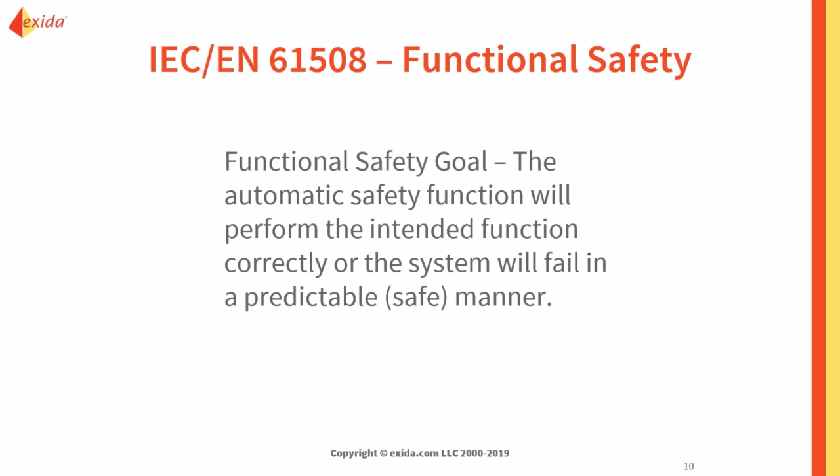Functional safety enables that freedom from excessive or unacceptable risk. And it's achieved through following something called the safety life cycle. And we will look later in this webinar at what the standards say about that safety life cycle. In general, functional safety has been adopted from two main industry standards, IEC 61508 and IEC 61511. And we're going to see what those are next.

So what are functional safety standards? There are many different standards out there in functional safety. The overall, or the main standard, is IEC 61508. It is sometimes referred to as the umbrella standard because it kind of covers all of the other standards that fall beneath it. It's targeted towards OEMs or manufacturers.

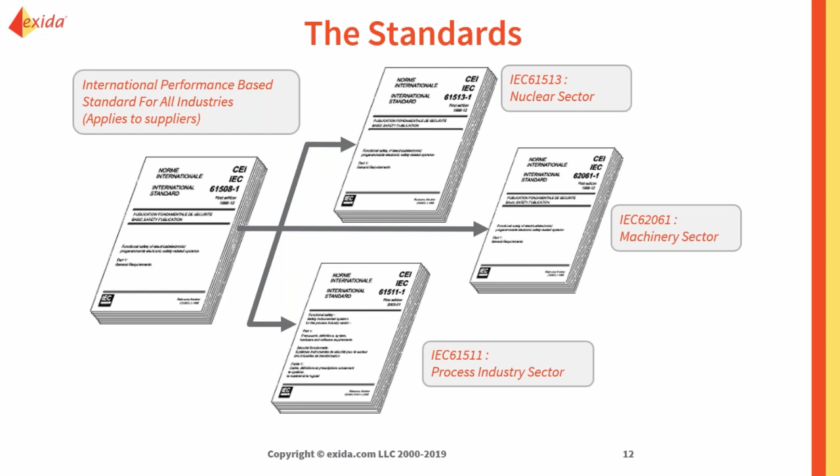However, underneath it fall more specific standards for each industry. So if you are in automotive or nuclear or machinery or process industry, under this IEC 61508 standards fall those more specific standards. And we're going to talk about the two primary standards that come up in functional safety and in the process industry, which are IEC 61508 and IEC 61511. And we're first going to look at IEC 61508.

The newest version was released in 2010, and it is aimed at manufacturers. So it is going to be talking about how to build a device and make sure the device is going to work correctly. It's going to apply to any automatic protection system, and it helps shield against both random hardware failures and systematic design failures.

Some of the great things about IEC 61508 is the way it was written. It can be applied to both project and product level work. So that could be the same off-the-shelf device used in many different applications, or it can be applied to making a specific product for a specific customer.

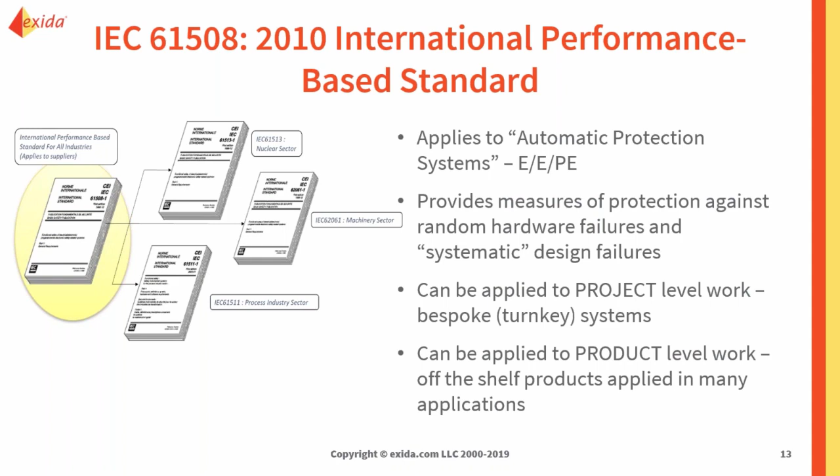It's also a performance-based standard instead of a prescriptive-based standard. The great thing about it being performance-based is it gives you end goals which you want to achieve, but it lets each company individually decide how they're going to achieve those. If you had a prescriptive standard, like a lot of the standards are, it gives you the steps and the directions. Step 1, 2, 3, 4, in that order you must do. However, IEC 61508 gives you your performance goals or those end targets to shoot for, and you yourself can decide how exactly to implement them.

IEC 61508 came about when people from different working groups and national standard bodies from all around the world came together because they wanted one area for functional safety, because it was scattered throughout many different standards before. And they wanted to bring it together under one document, one big standard, and they made IEC 61508. From that standard, it then branched out into more specific industrial standards that we talked about, like the automotive or nuclear or machinery, or the process industry like IEC 61511.

As I said earlier, it was originally made in 1998 and 2000, but the latest edition has been updated in the 2010 version of the standard. And the standard is targeted to suppliers, those people making devices. And it's mainly used by safety equipment suppliers to show that their devices, their equipment, is suitable for use in safety systems.

It contains requirements for those suppliers or manufacturers of process controls and instrumentation for component, element, and subsystems. And because of those requirements in the standard, a lot of end users usually seek suppliers that have products that are certified and proved that they meet all of these requirements by a third party.

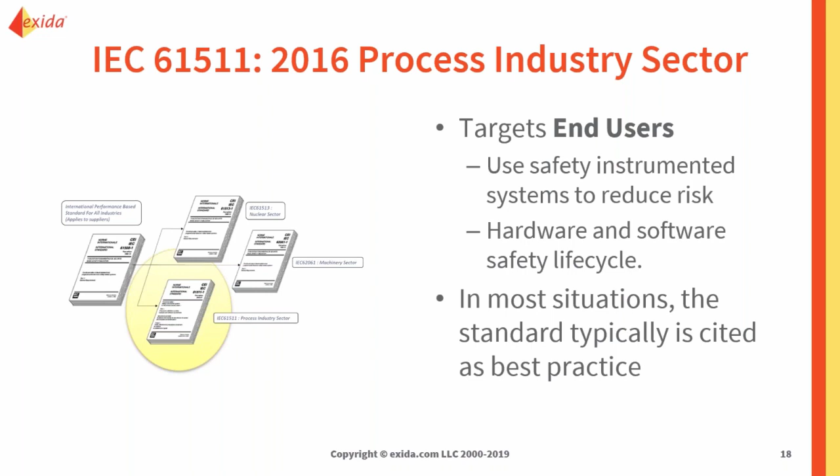The main objective of IEC 61511 is to use safety instrumented systems to reduce risk to some tolerable level by following a safety life cycle and maintaining the associated documentation. Just like IEC 61508, the standard focuses on a life cycle that processes and tries to manage risk. IEC 61511 was originally published in 2003, but its latest edition was published in 2016.

A couple fun facts about IEC 61511. Just like IEC 61508, it applies to any automatic protection system. It falls under that IEC 61508 umbrella. So if you ever find a requirement that isn't listed in IEC 61511, it says, please go back to IEC 61508 to see what it says about it. It is broken up into three main parts: one of rules and regulations and two guideline parts.

Just like IEC 61508, it gives a definition of the concept of what a SIL is, what safety systems are, and what that safety life cycle is. However, this time, it's how those end users can use SIL and how they can figure out how much risk they need to remove from their plant.

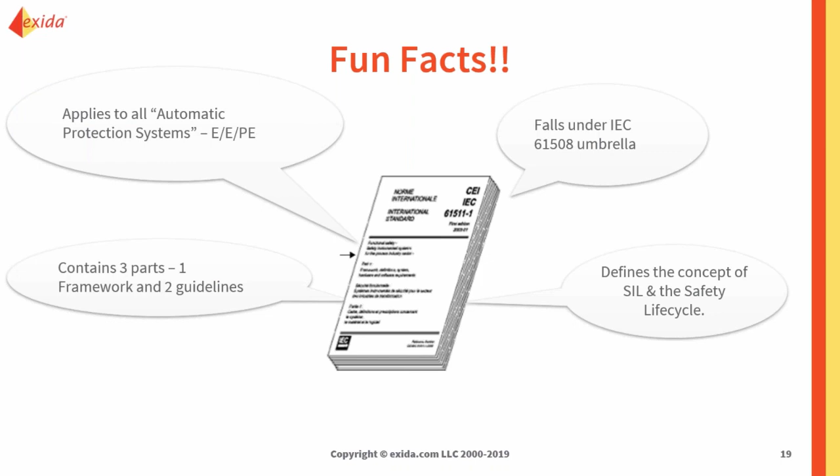IEC 61511, just like 508, recommends the use of a functional safety life cycle, and any life cycle can be used, but the standard also gives you an example and lays out a process which is pretty nice and easy to follow. Just like IEC 61508, it's broken up into three main sections: the analysis phase, the realization phase, and the operation phase. In the 2016 edition of the standard, it addresses cybersecurity in the life cycle, showing how more and more of a concern cybersecurity is becoming.

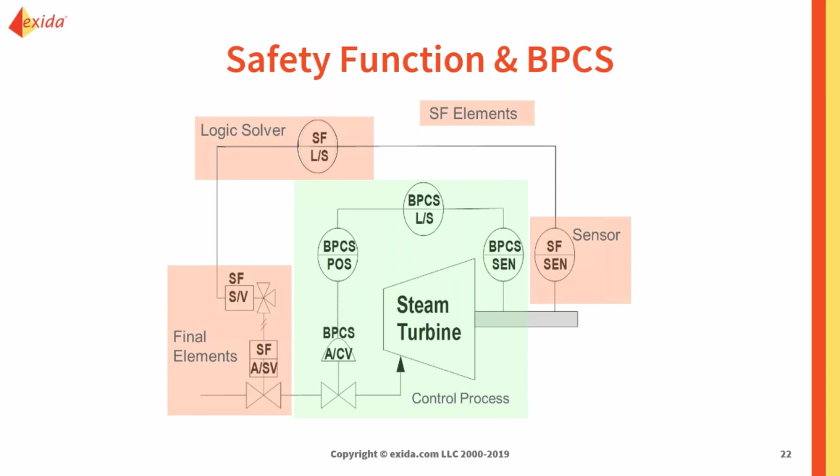So your safety function is going to be the action of a set of equipment to make sure that a particular hazard doesn't happen or it gets mitigated. It is the job of the safety instrumented function, and we'll learn about that later on in the webinar. So as you see here, you have a safety function. It has its own sensors, logic solvers, and final element that can control the process besides the normal operating process. So with a safety function, you're going to want to realize that there's a problem and act upon it.

So what are some examples of safety functions? An example that most people think of right away if you're in the process industry is an emergency shutdown valve, or an ESD valve. What does that do? It will shut down the process. Another example of a safety function is a sprinkler system. Upon realizing there's a fire, the sprinkler system acts, puts on the sprinklers, and mitigates your issue, hopefully. Other examples of safety functions: high pressure in a vessel opens a vent valve.

One thing that we get asked often is, what about an alarm? Is an alarm an example of a safety function? On detecting a fire, maybe an alarm triggers and it minimizes the damage and possible injury. So would that be a safety function? Well, no, not really. Yes, it's doing a great thing. However, it is not a full safety function, since it never achieves that safe state. It never tries to mitigate the hazard. So remember, for it to be a safety function, it needs to implement that automatic mitigation of a particular hazard. So that final action must be included. But if that alarm system was tied to your sprinkler system, now we have a safety function.

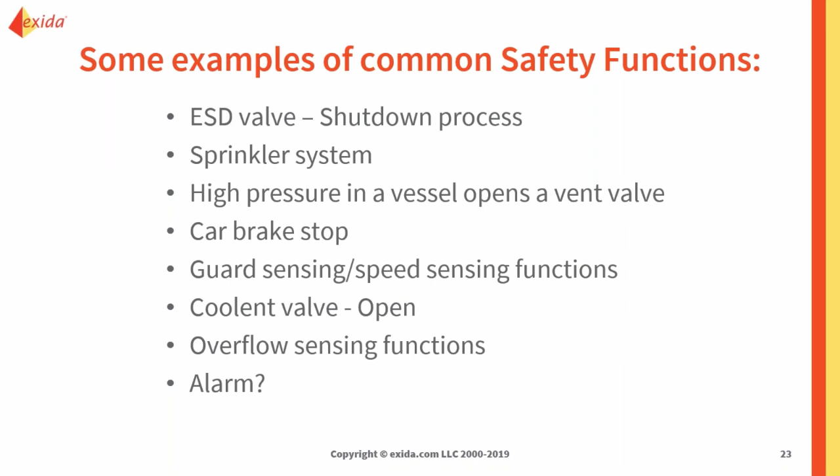The next section is SILs and SIFs and SIS, oh my. So what do these all really mean? As I told you earlier, there are so many three-letter acronyms in functional safety. It's pretty much a joke around here.

Three of the most common and heard of acronyms in the basics of functional safety are SIL, SIF, and SIS. Where SIL is going to be your safety integrity level, your SIF is your safety instrumented function, and your SIS is your safety instrumented system. And we're going to take a look at what those three acronyms mean as well.

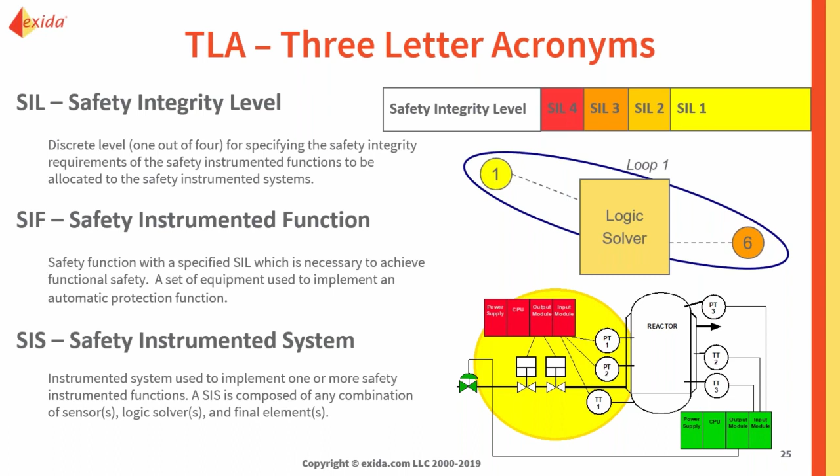So first, let's jump into SIL. That was one of the first terms I heard when working here. And if you're new to functional safety, maybe that's one of the first terms you hear as well. I know that there's some people that know nothing about functional safety, but they've heard, oh, I need a SIL 2. So what does SIL actually mean?

Well, SIL stands for Safety Integrity Level, and it is a quantitative target for measuring the level of performance needed for a safety function to achieve that, how much risk they needed to remove from that hazardous condition. Safety integrity levels are defined in both IEC 61508 and 61511 standards, but as you know now, they're in different verbiages and different tones, so they're going to define SIL slightly differently.

IEC 61508 talks more on how the devices are put together and achieve SIL, where IEC 61511 talks more on how the end users can use those numbers and estimate how much risk they need to remove. Defining a target SIL level for a process should be based on the assessment of the likelihood that the incident will occur and the consequence of that event happening. Oops.

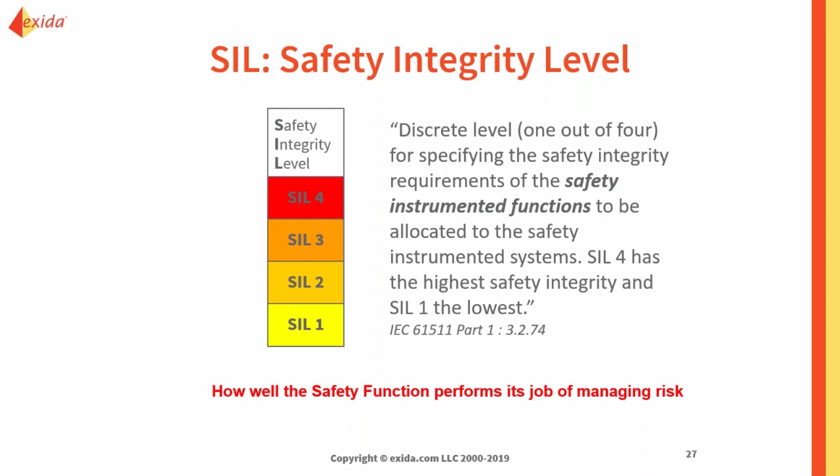So the next term is a SIF. What's a SIF now? Well, a SIF is a safety instrumented function, and this is a set of equipment intended to reduce the risk for a specific hazard of a safety loop. So its purpose is, first of all, to automatically take a process to the safe state if some condition is violated or if some hazard occurs or some weird condition is happening.

Either take it to a safe state, or it can permit the process to move forward in a safe manner with things called permissive functions. Or it needs to take action to mitigate the consequence of an industrial hazard. So your SIF is going to be a collection of instruments, of sensors, logic solvers, final elements put together to prevent one bad thing from happening.

It includes elements that detect that something needs to happen. It includes elements that decide that you need to take the action. And then it includes elements that actually carry out that action to bring it to the safe state. So it needs to have an ability to detect, to decide, and to act. If so, then it will have a designated safety integrity level for that function. So if it is able to detect, to decide, and act, and it protects against one hazardous condition, it can have an associated SIL with it.

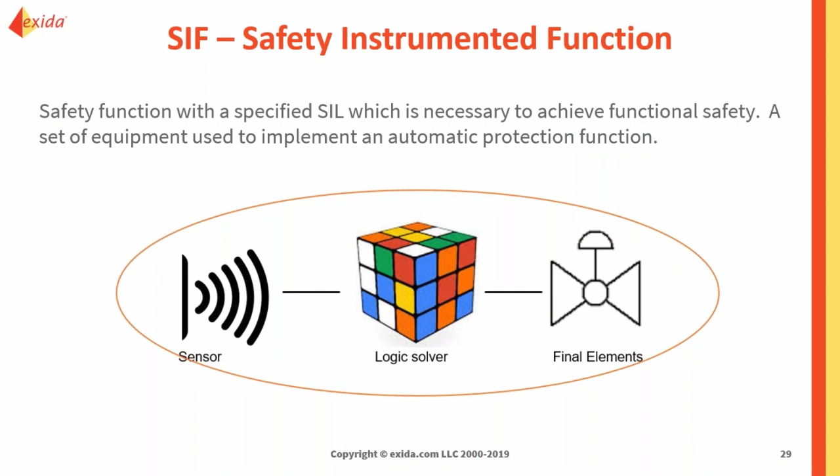Your system usually has a number of different SILs associated because each of your SIFs has a different SIL level with it. So you might have 3 different SIFs with 3 different SIL levels. So it's technically wrong to say you have a SIL for your entire system or your SIS.

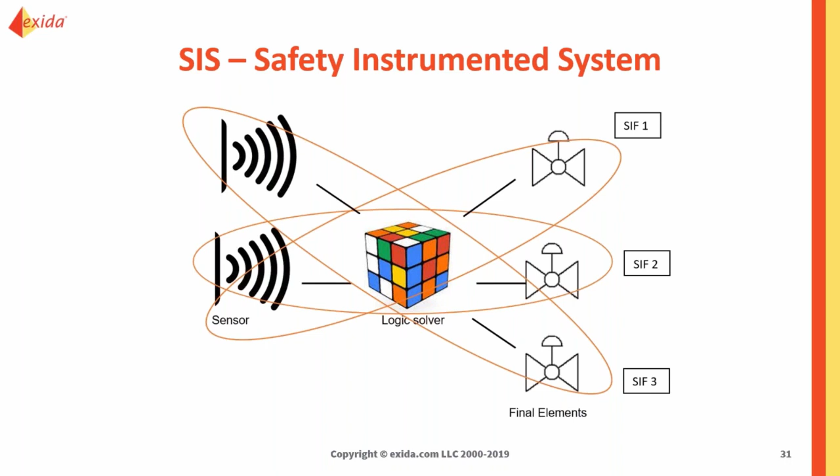So those were some of the topics that have been covered already in some of the blogs and articles, and I wanted to get a webinar up to speed, but I wanted to give you a sneak peek on the articles and blogs to come as well. So now that we know what a SIF, SIS, and SIL are, now we want to know, well, what does that SIL mean? How does a product get a SIL level? How is that SIL level used by end users? And what is that certification to a SIL level? With those, there's going to be upcoming webinars, blogs, articles, and LinkedIn posts as well.